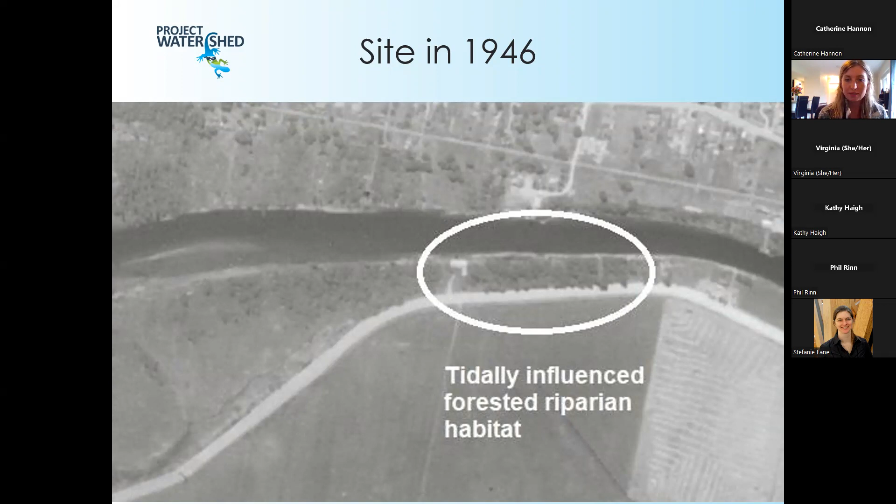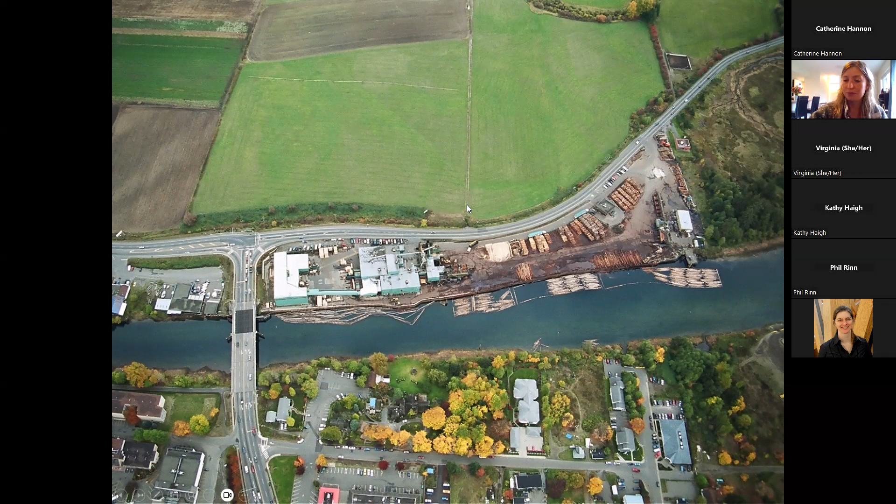As you folks, I'm sure, know, the sawmill shut down in the early 2000s, in 2004, and then underwent a remediation process. So when Project Watershed purchased the land in 2021, this is what the landscape looked like. Between the time of this photo and this photo, the mill was shut down in 2004, and then from 2006 until 2008, the lands underwent an extensive remediation. The remediation was then reported out on, and then in 2011, the site was offered a certificate of compliance from the province and then was put up for sale.

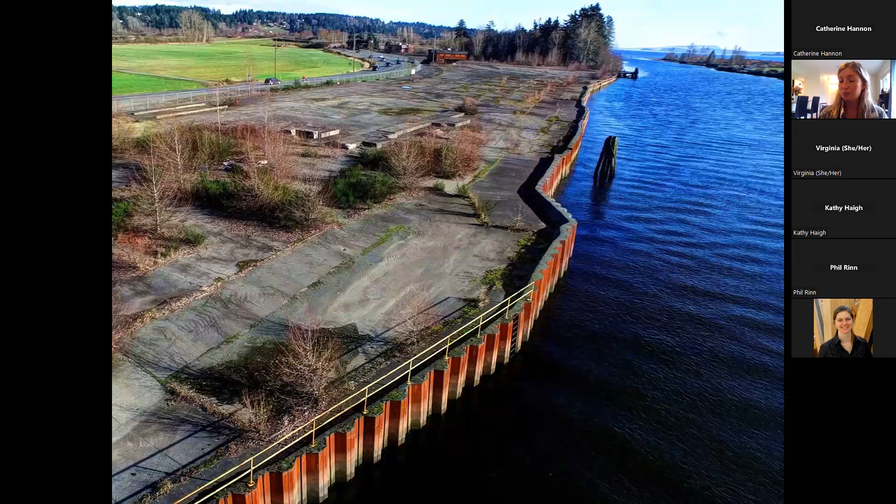At this point, the lot sat very much like this for an extended period of time until 2017, when Project Watershed, in partnership with the K'ómoks First Nation and the City of Courtenay, entered into an agreement with Interfor, who was the owner of the landscape at this time, to hold the land until we were able to raise the required funds for purchase. So from 2017 to 2020, we did extensive fundraising to get to that $3.2 million goal. We eventually reached that in late 2020 and then entered into a Bare Trust agreement with the other two partners to purchase and transfer the land in early 2021.

So the overarching goals of the Kus-kus-sum project are to restore the ecological values of the site, to reconnect the site to the floodplain and the Courtenay River through the removal of the steel piling wall. It is also a process of reconciliation and rematriation of landscapes, which means that the landscape after its successful restoration will be rematriated or returned to the K'ómoks First Nation.

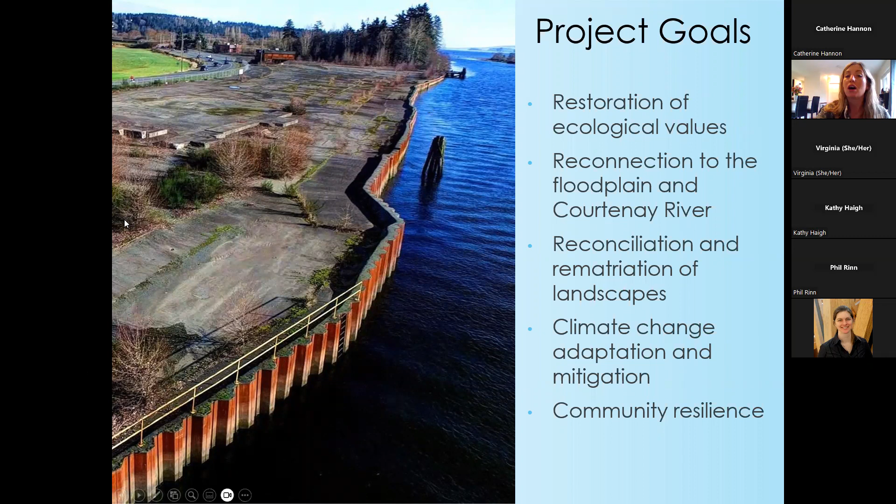The project also represents significant climate change adaptation and mitigation values. So this includes flood control, storm surge buffering. It also includes things like carbon sequestration. So there are a lot of different values that are embodied in the site. And of course, the hope is also that this project will offer community resilience in this specific section of the region.

So when we were developing the plan for Kus-kus-sum, we did some two-dimensional hydraulic modeling to understand what the flood capacity would be and how the site would react in a couple of different scenarios. So shown here is a high winter flow event. So this is the discharge of the Courtenay River down here in the left. This is the tide height at the Comox Harbor. And then this is basically what the site looked like before, without the restoration plan. So just as it was in 2021. And then this is how the site will react in those flood conditions once it's restored.

So you can see deep water is shown in yellow and red, and less deep water, so more shallow water, is shown here in light blue. So there's deep water pool environments throughout the site. There's some tidal channels shown here. There's a tidal marsh island, and then the site actually ends here and continues here. So this shows the upland area here.

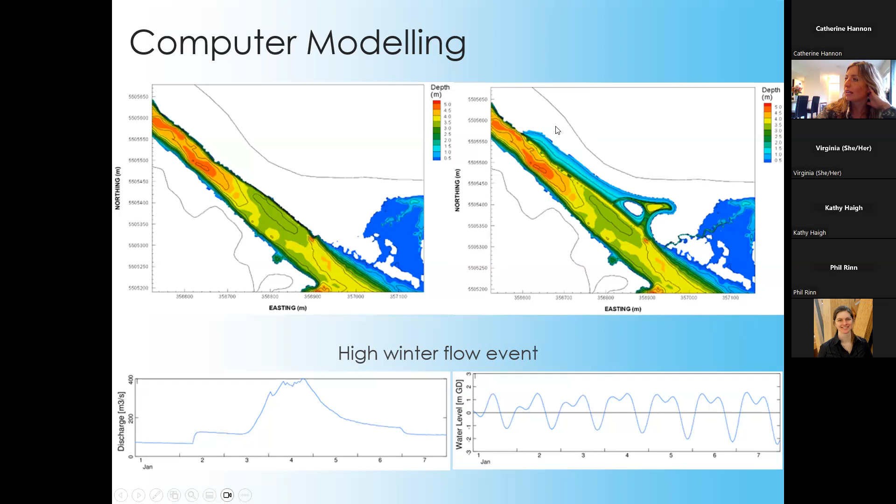So this is one of the restoration designs. So you can see here some of the specifics. So once again, shown here is the high water mark. This is that tidal marsh island. This is the deep water pool, which will be significant salmonid habitat, and then the channels, which water will flow through throughout the day.

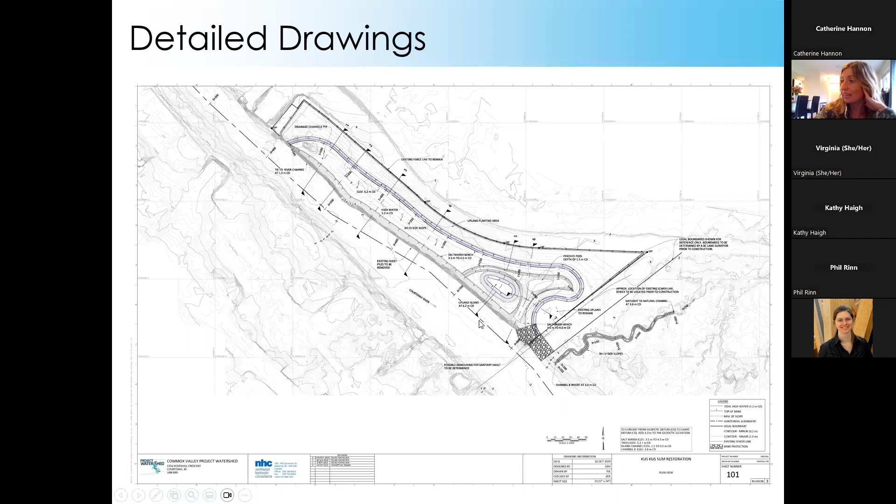So once it's restored, it will have a suite of different vegetation throughout the site. So in the upland area that we spoke about, you can see some different species, some large growing species, specifically conifers, things like Sitka spruce. We also have some firs in there. We also have things like alder, cottonwood, and some shrubby species like high bush cranberry. We also have red flowering currant, some dogwood, twinberry, hawthorn, rose, and salmonberry as well.

Once you get into these kind of gradient areas, that's when you have things like the hardhack and the sweetgale. You also start to get things like the willows as well. And then as you get down into these lower areas, that's when you get into the high, mid, and low tidal marsh communities. So at the top here, you'll see things like I mentioned, tufted hairgrass, springbank clover, meadow barley, sweet-scented bedstraw, and then as you get lower, that's when you start to see those significant Lyngbye sedge communities. These are really important for salmonid habitat.

They offer great habitat for rearing and foraging outmigrating juveniles because they get full of bugs and then the bugs fall off. So that's a phenomenon known as bug drop, and essentially all those bugs get eaten by the juvenile salmonids. And then as you get into the lowest areas closest to the river, that's when you start to see things like the Glaux and Triglochin species as well. And currently in the north section of the site, you can see examples of each of these different communities. They're still small because they were just planted last year, but essentially you can start to really see these vegetative communities progressing, which is really exciting.

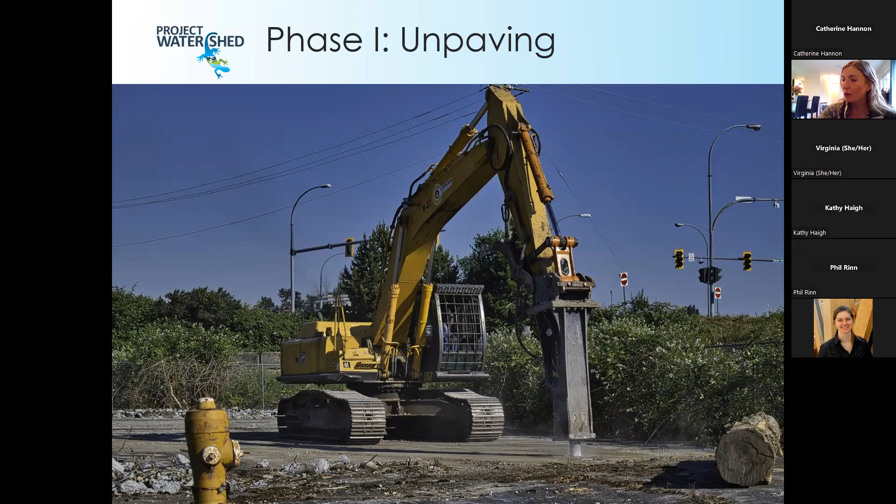So here's a photo of the first step. This was the unpaving. So this is breaking up that concrete with a special bit on the excavator. And from there, we were able to dig down with the bucket, break up the concrete and pull out all the rebar and steel mesh that was throughout. So this is a photo of that here. It's looking pretty good and pretty exciting.

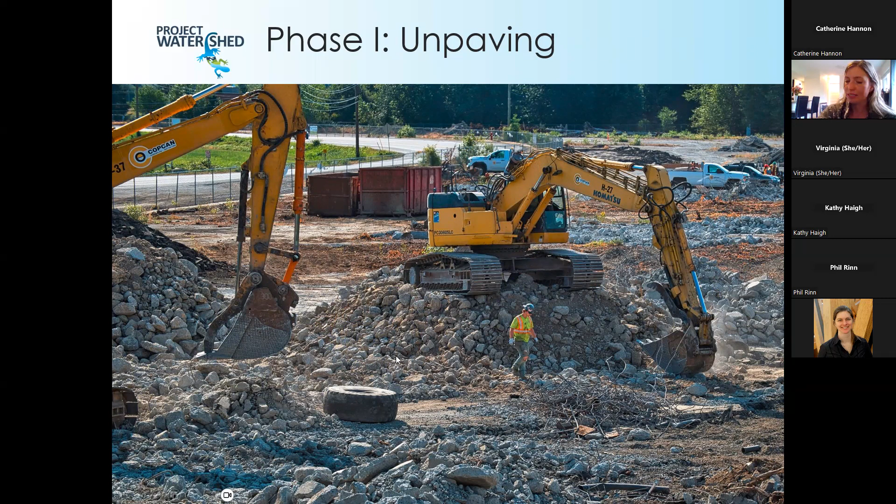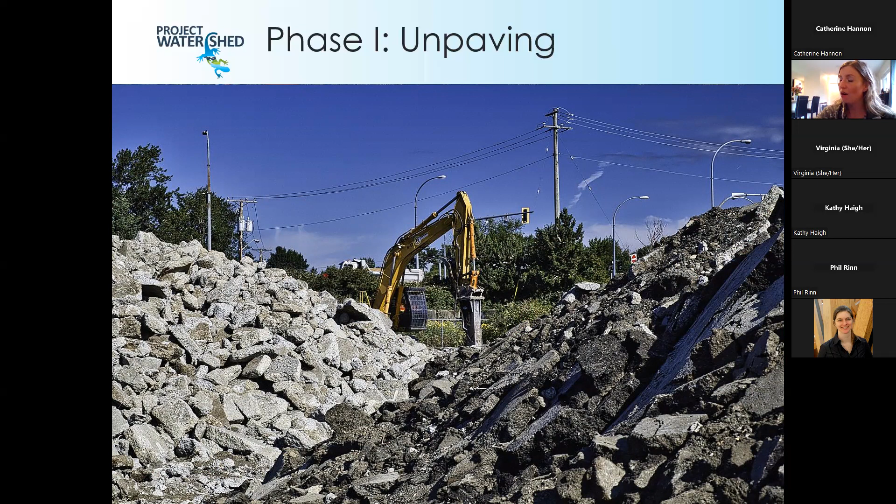Here is a wonderful pile of concrete and another wonderful pile of asphalt. All the asphalt was actually recycled. It gets melted down and then mixed with gravel and turned into a product used for maintaining roads called RAP. And then this here, this is concrete, and it was actually crushed down into smaller pieces, which I will show you later. And all of that was actually recycled and repurposed around the valley.

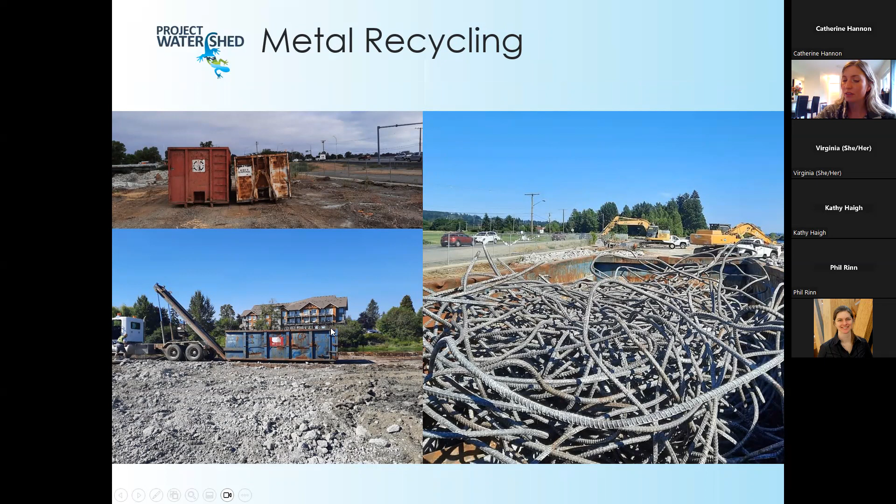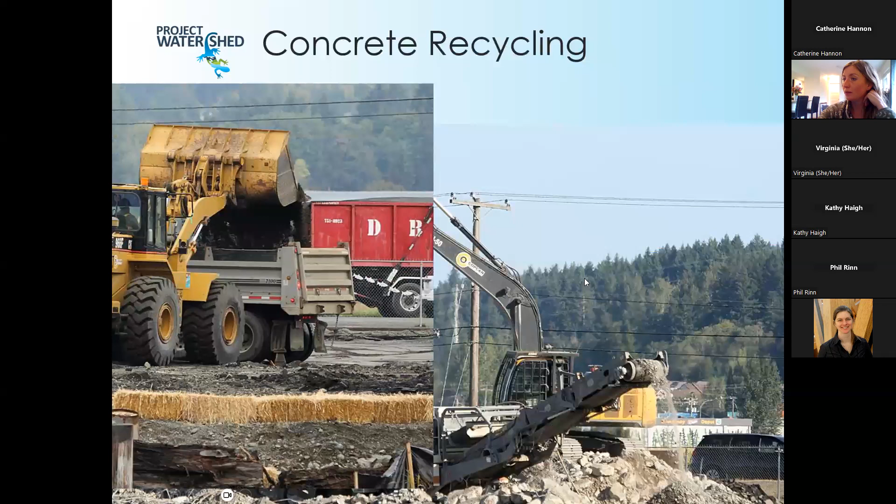This is an example here of the metal recycling. So hundreds of bins of metal were actually recycled off the site, and all of these were pulled out from within the concrete matrix. Here is just a picture of the machinery that we mobilized to site to crush up the concrete. It was crushed into 3-inch minus, which is a reusable, functional material that's often used for fill or road base. Here's another photo of that, just loading up all the trucks, moving off site.

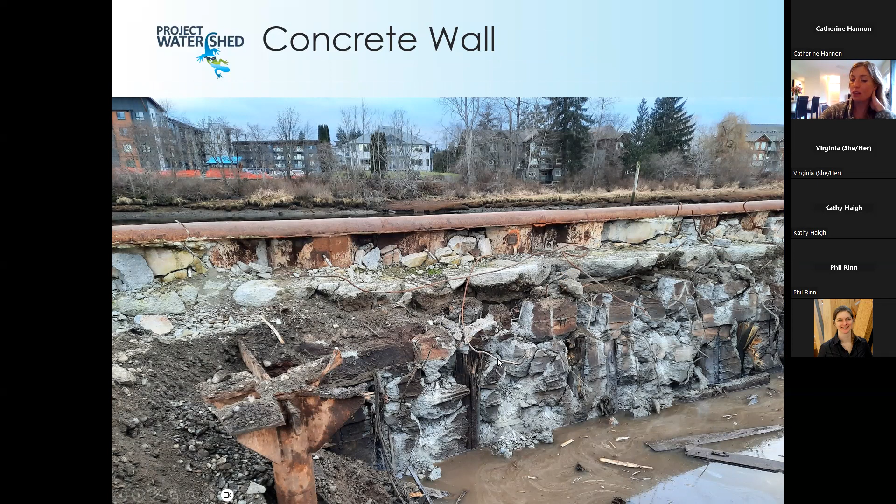Of course, there were some unknowns that we ran into throughout the restoration. For example, we found a 200-meter concrete wall just underneath the surface along the steel piling wall. So we had to remove that. That was a very technical piece of work because with this excavator here, you weren't able to get water into this bit because it would basically get sucked up into the machinery and ruin it. So we had to be very careful, pumping a lot. You can see some pumps down here, and just being really selective with how we used the machinery.

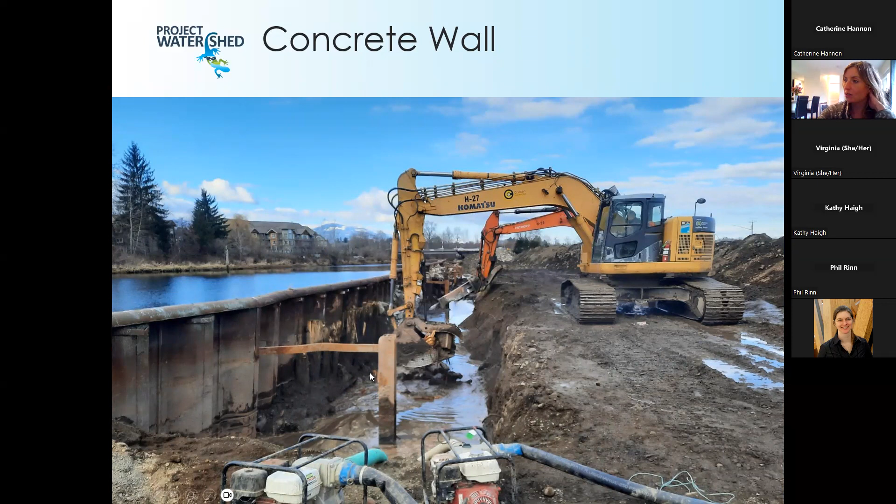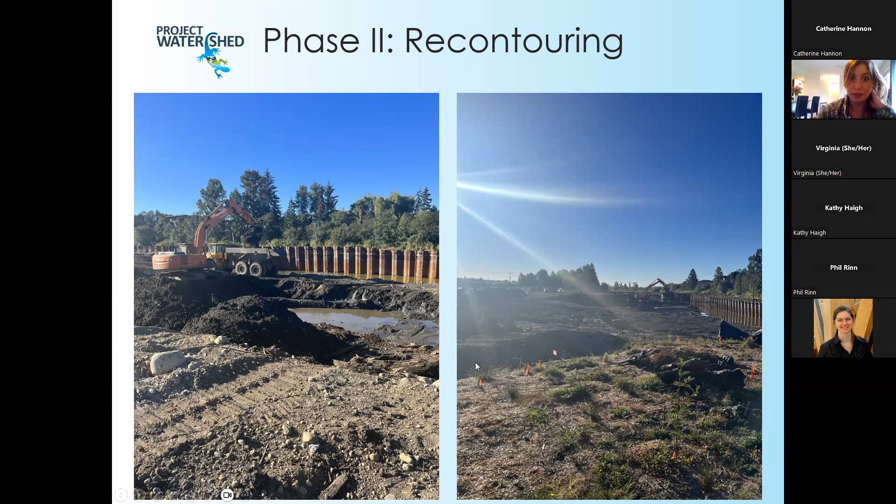So then last year we were able to enter into the recontouring phase. So once we had essentially popped the top on the site, removed all the concrete and asphalt and repurposed it around the valley, that's when we were able to start the earthworks, which consist of basically getting the site back down to a natural grade, so back down to natural elevations because it was filled. So getting back down to those natural grades, and then from there, bringing in some topsoil and amendment. And then from there, that's when we're able to plant.

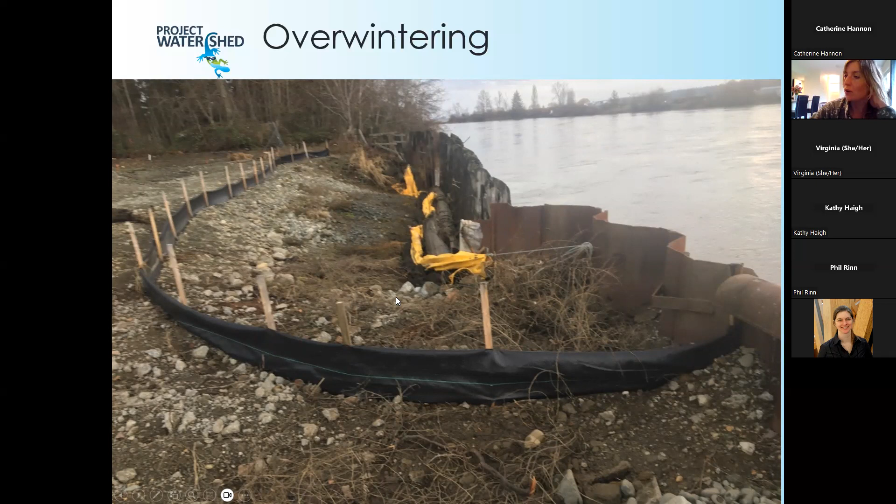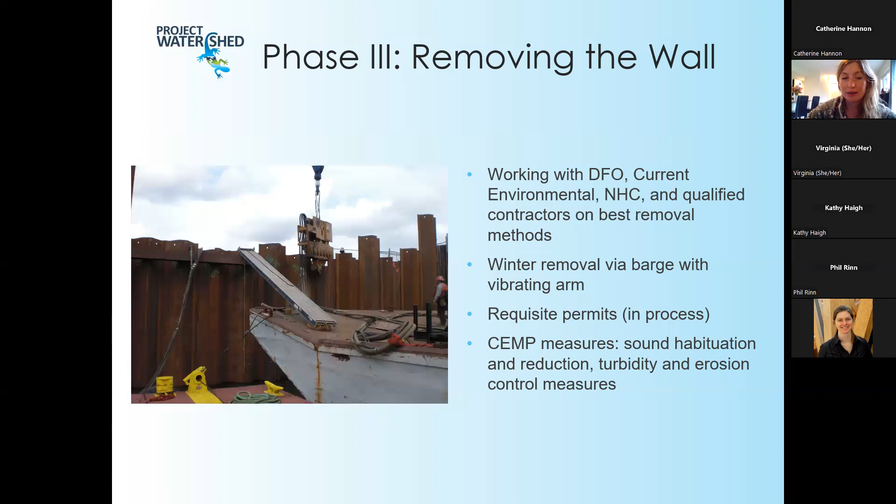So I'd just like to acknowledge the wisdom and hard work of a group of folks from our partner group. So the Kus-kus-sum partner group is staff and elected officials from each of the 3 partner groups: the City of Courtenay, the K'ómoks First Nation, and Project Watershed. We provide project updates once a month, we discuss relevant topics, and we plan for the future. This has been a great platform for solutions-based thinking and collaboration, and it's been such a supportive and wonderful group to work with. So I'm very thankful for this group of folks and I look forward to continuing to work.

So as we do the regrading and recontouring works on site this year, as well as the replanting, there's a bunch of different measures that we need to have in place to make sure that the restoration work itself doesn't cause any damage to the environment. So we know that our long-term footprint will be overall positive, but we just want to make sure that in the process of restoration that we're not causing any undue damage.

So that includes doing ongoing machine maintenance and monitoring. So we keep a close eye on the machinery, make sure there aren't any leaks. And when there are leaks, we have spill kits on site to deploy. And then we're able to do maintenance away from the river for those machineries. Like I said, we have a spill management program in place.

We also have turbidity and erosion control structures installed. And we have ongoing water quality monitoring as well. So whenever construction starts, the water quality monitoring starts as well. So we take mostly turbidity, but also pH, temperature, and other measures upstream, on site, and downstream from the site to just make sure that the construction isn't having an impact on the water quality in the area.

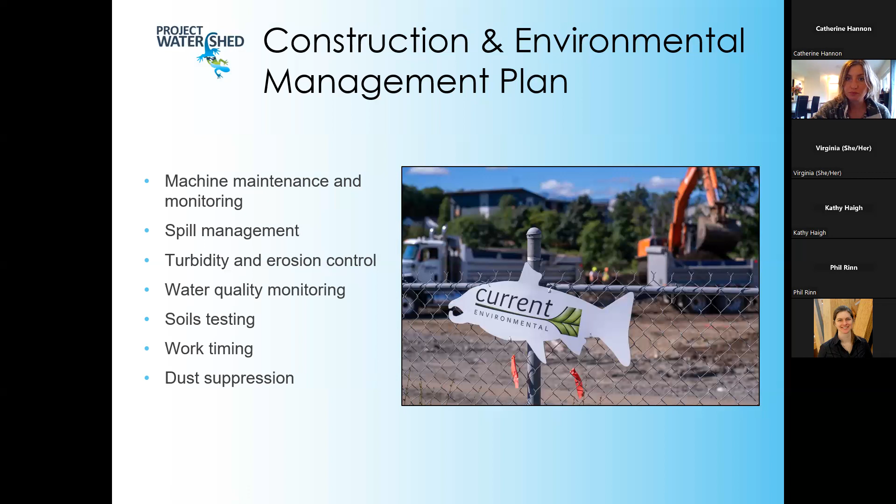So the key works in 2023, we started off the year by doing a maintenance of the turbidity and erosion control structures at the south end of the site. That was required because of the extensive flooding that happened at the end of December. So we mobilized again in January to make sure that all of the structures that hold the water in and stop any additional erosion and turbid water from leaving the site, that those were

well maintained. So we went in early January to maintain those structures, just in case there was another king tide event. So we anticipated that there might be another flooding event. We did maintain the structures, but there was no additional flooding. So now the structures are just in really good repair, which is great.

So this year, we'll be continuing the regrading of the site. So we'll be starting from basically where we leave off planting. So you can kind of see that on the site now, but basically we'll be starting from the north end, moving south. We'll try to basically go as far as we can with the amount of funding that we have in place. Once we've recontoured the soil, that's when we can go in and we can bring in topsoil and compost, and then we'll also mulch, and then we'll start to plant native species.

We'll be doing ongoing soils testing and, of course, sorting those soils and then determining where they can go for off-site removal. So some of the soils on the site are clean and they can go to any old site for removal. Some of the soils on site need to be moved to a registered facility. So we have identified those facilities and we have good working relationships with them so that we can move those soils off-site.